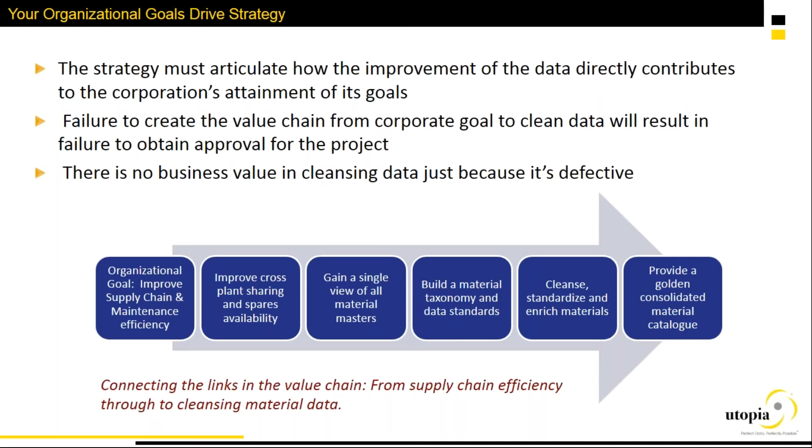We need to build a material taxonomy. We need to cleanse and standardize that information so that we can get to a single catalog that will help us improve that cross-plant sharing and spare availability process. How do we get there?

So over the course of 15 years, I said that Utopia started in the data quality space, and that's really fixed. What we found, though, is that you need a comprehensive solution in place in order to fix the data and maintain the quality of that information. So we built out what we call the build, fix, sustain methodology. Fix is what we talked about, right? Let's improve the quality of the information.

Many of our customers came to us 15 years ago and said, hey, here's a material master file. Can you clean this up for us and give it back? We did that. It was a great business model, but what we found is that 2 years later, customers would come to us and say, we know you said to put in some governance and some standards around these material masters. We didn't. Can you fix it up again?

Gartner says that data degrades about 2 to 7% over the course of every single month. That's 24 to 84% of your data could degrade below what you might consider high quality. So in order to ensure that data gets good and stays good, this is the methodology that we employ. The build is really identifying that foundation. What are the standards that you're using? What are the business rules? Do you have a data quality culture in place?

Once you've established that, then you go into the fix, where you improve the quality of the information, you deduplicate the data, you enrich the information from external sources, unstructured data, etc. Ultimately, though, the goal is to get to that sustainable solution. And that's where technologies such as SAP's master data governance come into play, data quality remediation solutions, as well as the organizational structure, people managing data, and the processes that are needed in order to manage that data.

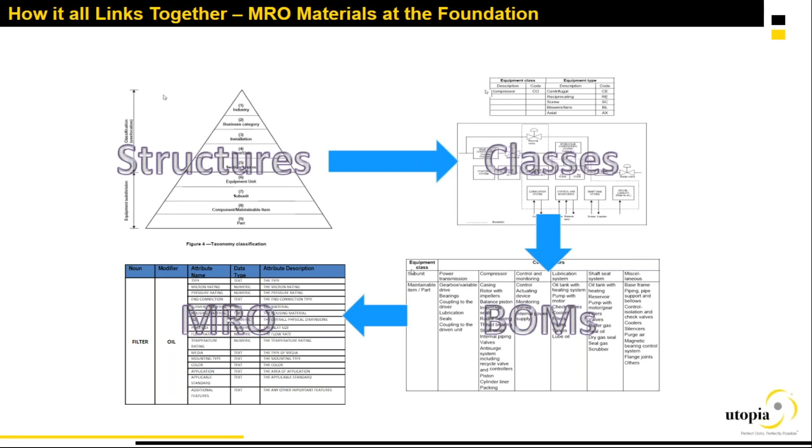So if you think about all of the activities in the maintenance world, all of the activities that you're trying to drive with maintenance efficiency, if you don't know what the spare is, if you don't know what bill of material it's attached to, if you don't know what equipment that bill of material is attached to, you don't have visibility to that entire hierarchy or that entire chain of information.

What does that mean at a detailed level? This is a good example of a material, kind of a before and after of what we're trying to achieve. Here on the left, you see motors, right? And these motors are described in multiple ways, multiple structures. There's no consistency to how abbreviations are being used or how the motor is described itself.

What we really want to get to is a consistent transformed description that says every single time we see a motor, it will have a noun, motor, it'll have a modifier, for example, AC, and then it'll have things like your horsepower or your RPMs.

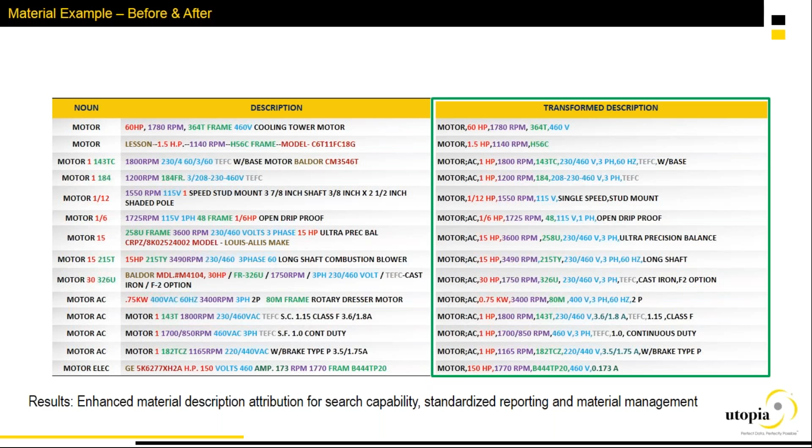That consistency, right, that enhanced material description enables you to provide better search capability, standardized reporting, and better material management processes. This is the goal, right? This is the end goal of what we're looking for, because the information about this material is going to impact all of those upstream and downstream processes.

Those materials would need to leverage industry standards and business rules, a taxonomy to describe them, so that you can go through and identify what is that noun, what is that modifier, how do you parse that data into appropriate attributes, how do you standardize things like units of measure, abbreviations, so that you can get to a process where you can create or enrich that data, whether it be from external systems, from internal catalogs, from things like your purchase orders.

Utopia also has a 2 million item repository of fully cleansed and standardized items that can be integrated into this overall process to enrich your existing data. Once that is done, you go through the consolidation or deduplication of that data. You don't want multiple items of the same make, model, number in your system, ultimately to get to a classification.

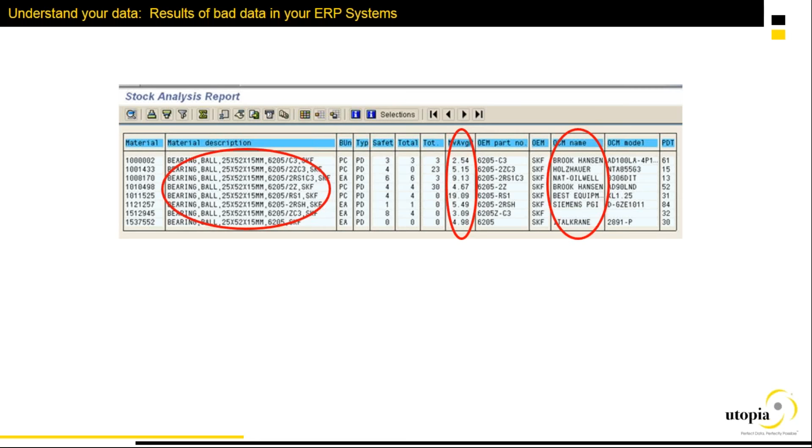Furthermore, there are multiple suppliers for these ball bearings. In one instance, Hansen, you are procuring the same ball bearing, functionally equivalent ball bearing, for nearly double the price. Why is that? Right? If you think about the impact of this data within your systems, you're never going to be able to get to optimized inventory.

You're never going to be able to reduce carrying costs if you have 8 of the same ball bearing with over 60 of them sitting on the shelf. You're not going to be able to get to spend analysis or strategic sourcing. Plant maintenance efficiencies are going to go down, right? Ultimately impacting your SAP environment.

Once you have a good understanding of the data within your system, the next step is to really establish that taxonomy, right? The classification and standards from which you will describe each and every single material. Utopia has developed an industry-leading standard, leveraging things like UNSPSC, IDEX, as well as our own internal extended taxonomy developed by our engineering team.

The end goal is something like this. This is an example of what a material data transformation program would yield. Just using the top line, you have an example of 4 ball bearings that are effectively the same ball bearing that were in the same system. Going through that cleansing process, you're able to remove extraneous details, standardize the way some of it's described.

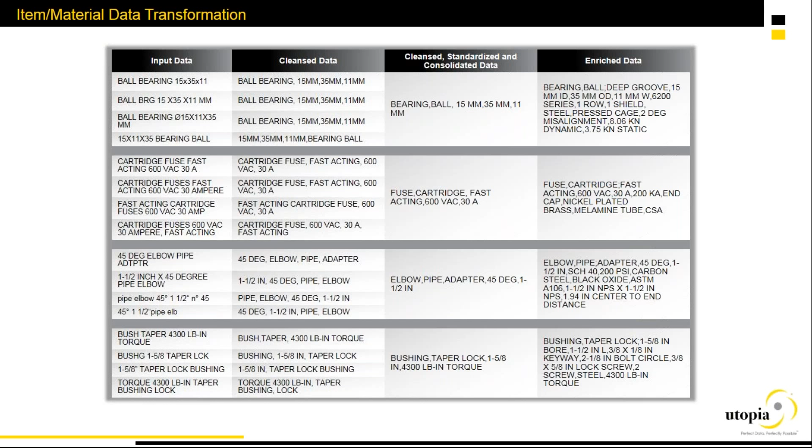Furthermore, Utopia was able to enhance this data to provide additional insight as to what it is. What are the details around that ball bearing in that enriched data on the right-hand side? All of this activity is actually driven by technology.

Ultimately, though, we do want to get to governance. I'd like to say that there's an easy button in this instance, but there isn't, right? You're going to make a significant investment in cleansing and standardizing this data. In order to ensure that that investment stays good for the long term, make sure you have governance in place. MDG is a great platform to consider doing that.

Coming to the end of our discussion, I'm quickly going to review a case study with a global LNG, liquefied natural gas producer in the Middle East. At the time, they're much larger now, but they were about $10 billion in revenue, 5,000 plus employees. And Utopia supported them with an audit of their MRO processes, the data in their SAP systems, because they had a concern over whether spare parts levels were adequate to support the uptime that they wanted in their plant.

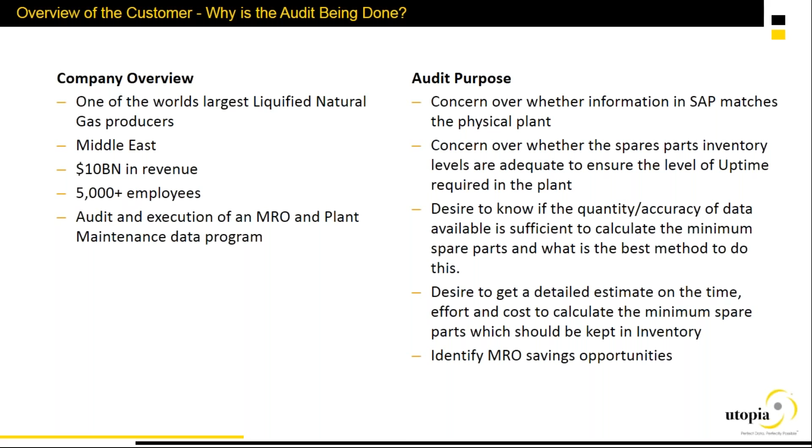They wanted to know if they could optimize their spare parts level with the quantity and accuracy of information they had in their systems. And then they wanted that detailed estimate to understand where are those savings opportunities in their organization. For them, and I think this applies to most companies that are on the phone right now, MRO materials and spares are really, really interconnected, right?

There are many things, if you're going to go through a spares optimization process, that you need to determine that optimum inventory level. Just starting at the bottom over on the right-hand side here, not all materials are really created the same, right? You have unique spares, and those are spares that would be assigned to a single equipment or a single bill of material. You have common spares that might be used across BOMs and equipment. And then you have those insurance spares that, God forbid something happen in your plant or facility, are only used when a catastrophic event takes place.

Inventory levels can be determined for each of those, right? And BOM completeness, what materials are needed for maintenance, is a key driver for that. Procurement performance is impacted. What happens if you don't have inventory, which is driven by SAP matching your physical asset in your plant. Ultimately, the accuracy of the material master, the taxonomy, the cleansed data, the linkage to the bill of materials, will help determine all of that success. All of the other stuff, failure, work order history, et cetera, can help determine the complete BOM accuracy, which can be complete or which can't be completed.

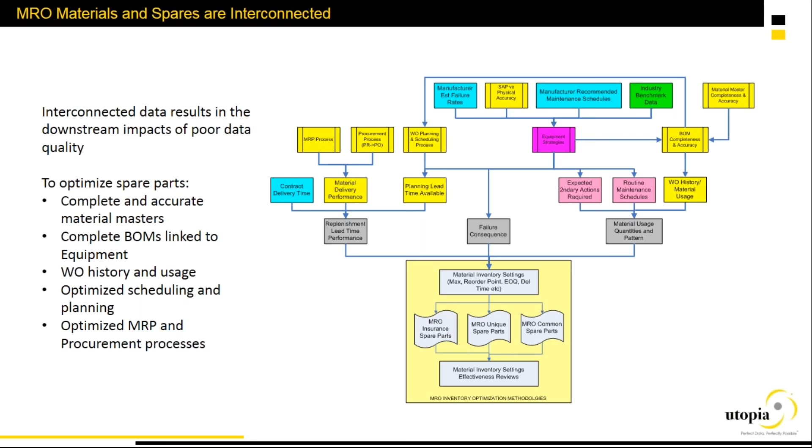So from that standpoint, to optimize those spare parts, the complete and accurate material master, complete BOMs linked to equipment, work order history and usage are all required in order to optimize that scheduling and planning process, to optimize MRP and procurement processes.

As you look at the next slide, this is an example of the analysis that was performed on the material masters. They probably had maybe 5 to 10% of duplicate materials in this instance, but what was more interesting was which materials were assigned to one BOM. So they had about 40% that were unique materials. Which material was assigned to more than one BOM, or those common spare parts. We then looked at materials that were not on a BOM, and that's the section broken out in purple on the right-hand side. 9% of those could be assigned to BOMs, right?

They had a work order issued, there was usage, but 16%, there was no way to figure out where that material was used. Manual intervention was needed to determine where it was assigned, or is it obsolete? If 16% of those materials were not assigned to a BOM and there was no usage, why are you maintaining those materials in your system? The 4Cs process will help with that. It'll help identify those spare parts in those manufacturing part lists.

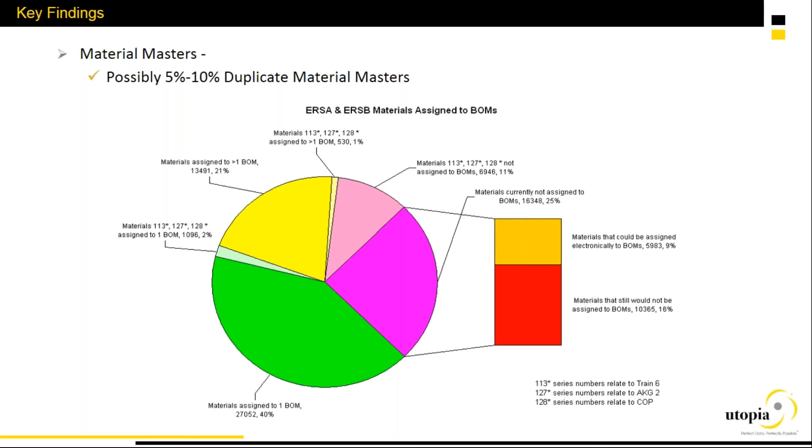Furthermore, we went and looked at the equipment BOM status. When we were looking at completeness of equipment tied to BOMs, what was important here is that 40% of the equipment didn't have a manufacturing part name, part number, or BOM.

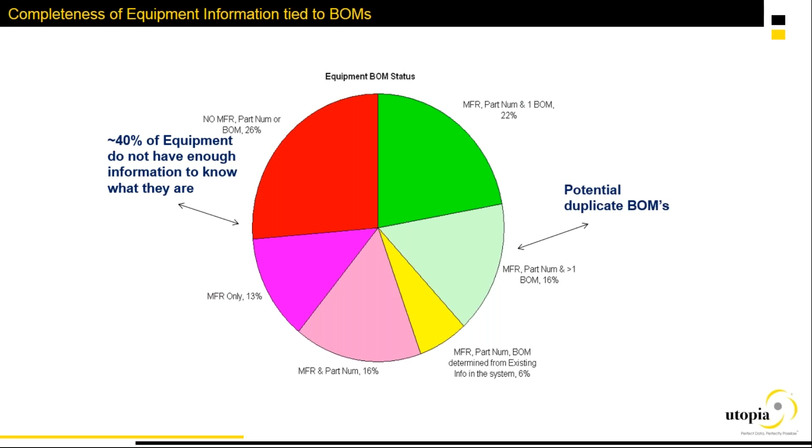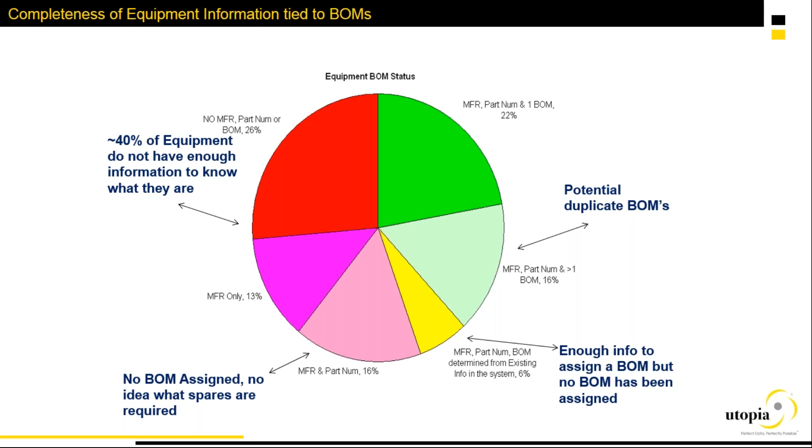Not enough information was really there to assign what they were. 22% of the materials had a manufacturer and part number. Ultimately, the goal being that you want one BOM and a complete BOM associated to each of those equipment. Those BOMs could be used across equipment, but one BOM and a complete BOM. With 40% not having enough to create a BOM, in that instance, you're going to have to go through a process similar to physical verification.

Ultimately, the recommendations and benefits that we saw from this program: material masters, they determined they had to go through that cleansing process to standardize, enrich, and deduplicate it. Create standard structures, right? If you think about how a functional location relates to an equipment, relates to a bill of material. But more importantly, because this was very much geared towards MRO and spares and inventory optimization, they determined that every maintenance material deserved to be attached to an assembly, which was a part of a structured bill of materials that was attached to an active equipment. That was their end goal.

Ultimately, yes, they were able to achieve complete and accurate information in SAP for equipment and materials, but that data cleansing process in and of itself wasn't enough. Really what they were looking for and what they were able to achieve was identified materials that were needed for each equipment, whether they were the regularly used items, inventory levels associated with that, or the insurance spares. They were able to reduce the risk of critical spares not being available.

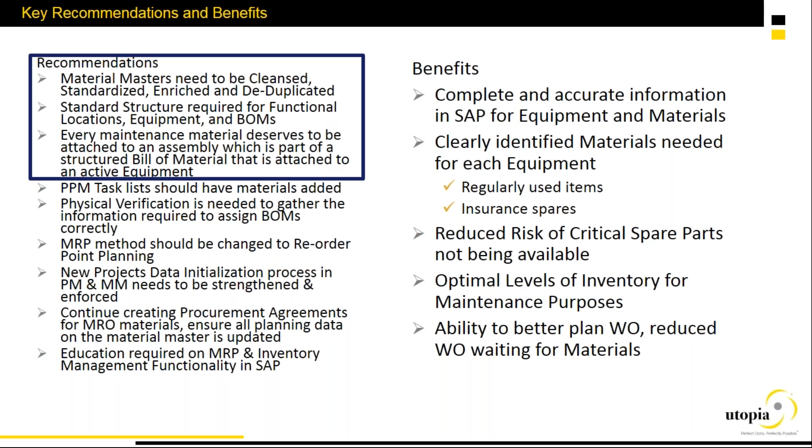They improved the levels of inventory for their maintenance purposes, so they didn't have as high carrying costs. And their ability to better plan work orders, effectively reducing work order waiting, guys sitting on the shop floor waiting for a material to become available because it wasn't listed as a part of their spares.

So in summary, I think there are 3 or 4 things that I'd like to leave you with. MRO materials are connected to and impact so many areas of an organization and the business, from procurement all the way out to the guys sitting on the shop floor. It is critical to have that information around your materials to be of high quality, correct, and valuable to those cross-functional teams. In order to optimize those processes, that cleansing and enrichment step is going to be key for the success if you want to optimize MRO and MRO inventory.

A combination of people, process, and technology need to be used. So your team, external providers, leveraging, for example, the SAP information management toolset can accelerate and improve those processes. I can't emphasize enough, though, the importance of governance in this whole thing. The investment that organizations make in a data quality program should not be lost because they don't have governance in place.

That governance can take many forms: MDG for enterprise asset management, MDG for materials, processes in place, an organizational structure, policies and procedures, information steward for a passive governance program. All of those things can support the ongoing maintenance of quality of information and should be taken into consideration as part of your program.